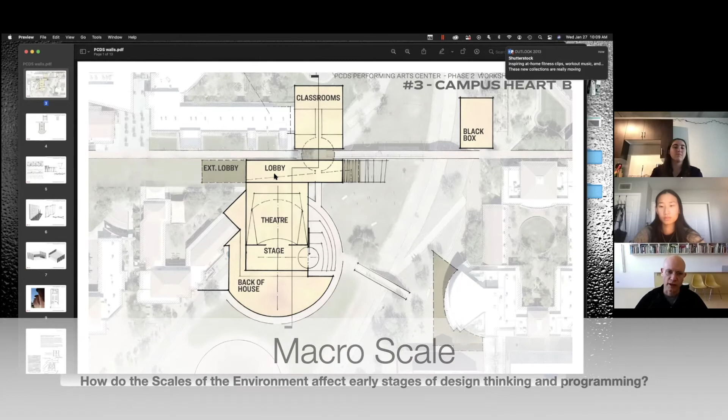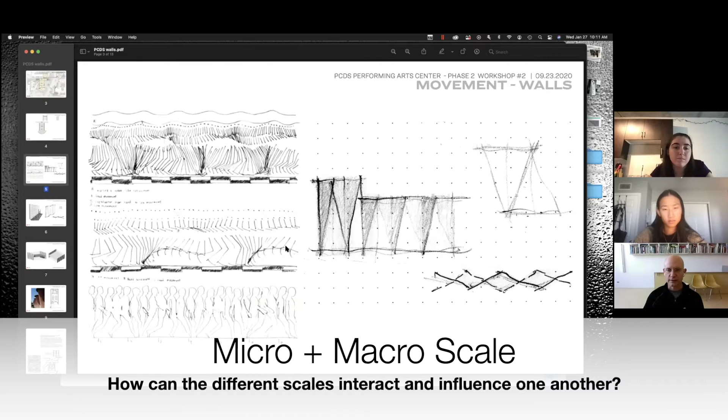We started playing around with what these walls could be, and we were sort of inspired by movement. And at the same time, we thought about what we could construct these of. And this is really the crux of the example of how to think about micro and macro and a site scale at the same time, and how they're so interrelated. And I would say that when they are interrelated and connected and serving each other, there's bound to be some level of success.

When they're not interrelated, I was trying to think about it this morning. I can't think of a good example of when the two scales aren't related, because we always develop our projects really thinking about both scales and how they relate. So we're looking at a way to do these movement walls, so you get lots of shade and shadow, and they have a big presence on campus.

And we were thinking about how you would build them, and we're thinking about just a simple 8-8-16 masonry module. And we knew inherently, and we've done this before, that lots of buildings are built out of these masonry blocks, and lots of contractors know how to build with them. If you take one, as you're stacking them, you can offset them a bit. And so this wall is an example of offsetting the block as you move up. And we said, what if for every course we offset them, basically about a 1/2 inch or 5/8 of an inch.

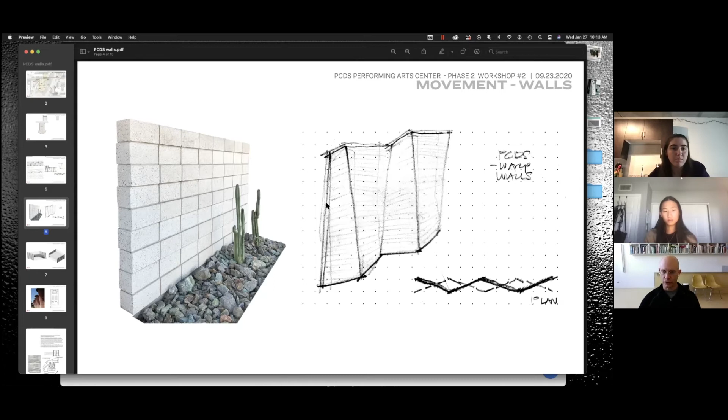Over the span of a 50-foot wall, how far could that wall move from top to bottom? And so understanding the nature of this 8-8-16 typical CMU block, understanding what it can do as you compose it into a wall, and understanding how you could push the limits of it, led us down the road of looking at these walls that started to wave and move, because as you were going from top to bottom, they were offsetting.

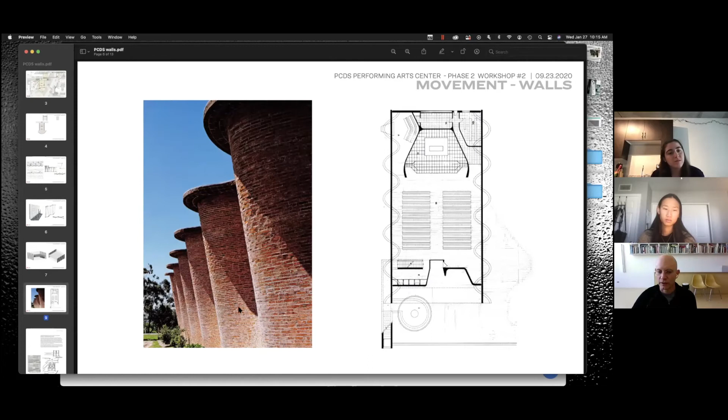And all of this was inspired by the architect Eladio Dieste, really considered a structural engineer. Essentially what he did, and this plan shows, the dark line is the wall at the bottom, and the curvy line is the wall at the top. What he's doing is each course changing the shape, so it goes from a straight line to a curve. And so we really decided that we were going to build on that.

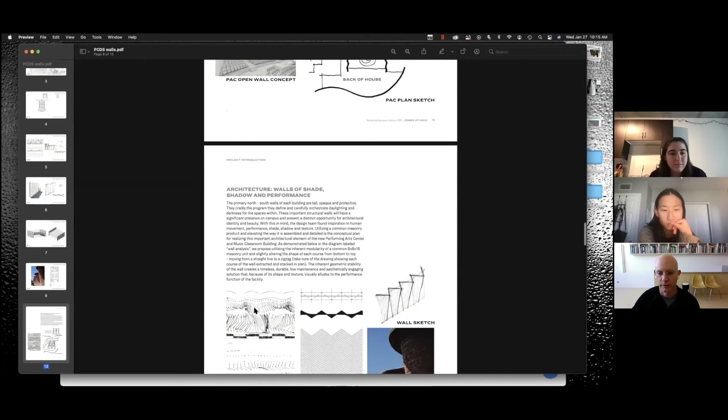And I wanted to show you this drawing here in the middle, because this is where we ended up. This is the sketch I did after our meeting with our structural engineer, where we said, okay, we're going to do the straight line at the bottom, similar to Eladio Dieste, and we're going to end up with a zigzag at the top. So if you look at that wall in plan, this is what it looks like: a straight line at the bottom, this zigzag at the top.

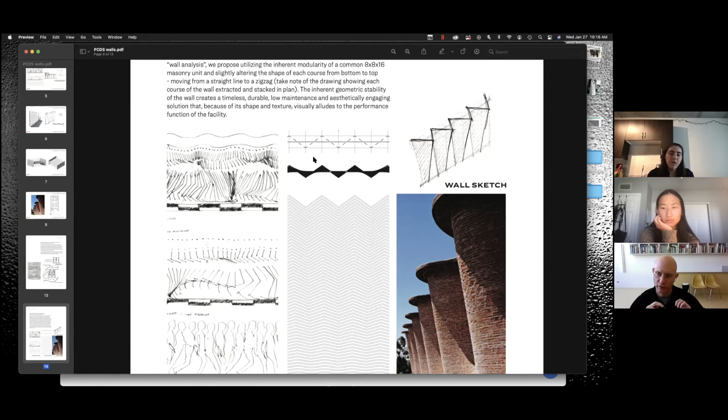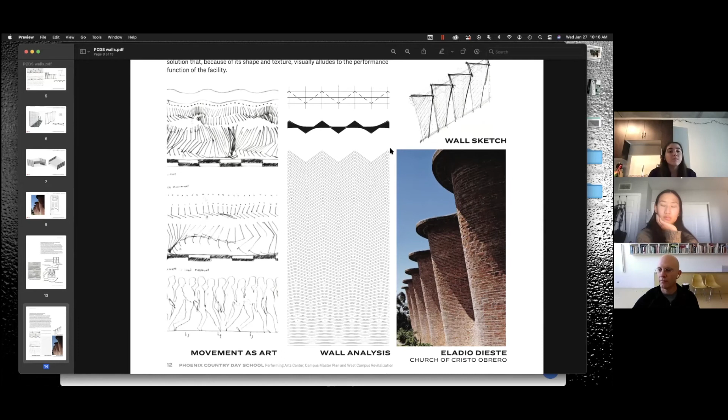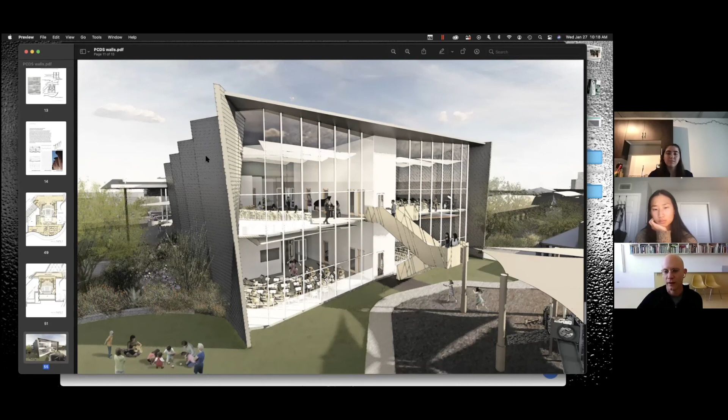And we derived how much of a zigzag we could achieve by offsetting each course a ½ inch, the limitations of the small scale and its impact on the larger scale wall. This drawing right here is every one of those walls. This is the wall at the very bottom as a straight line, and then each course as you go up 8 inches until you get to the zigzag at the top. Wow, it's amazing. In plan, these are the walls close to the bottom, and as you get to the top, these are the walls cut through. And this is a rendering of those walls, straight line at the bottom, zigzag at the top.

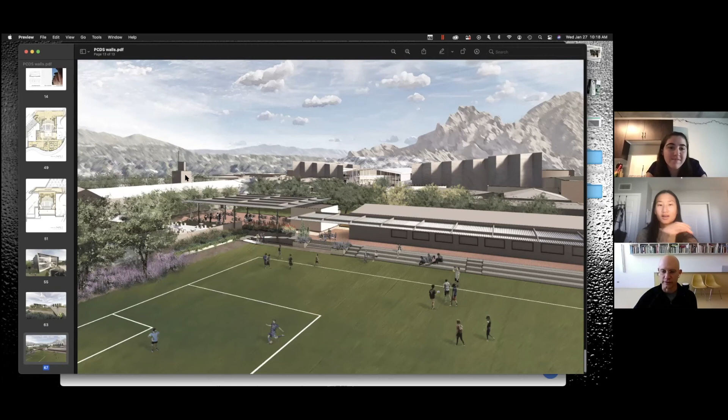Phoenix Country Day School is currently in the process of fundraising, and Jones Studio hopes to move towards construction once the budget is fully prepared. An interesting conclusion that Yasmin and I drew from listening to Brian was that the scales of an environment, site, macro, and micro, are most impactful in the design when they are fully integrated with one another. Although we also talked about site-specific design, such as orientation of thick walls and curtain walls to the sun and mountain views, it was surprising how many connections were made between the different scales.

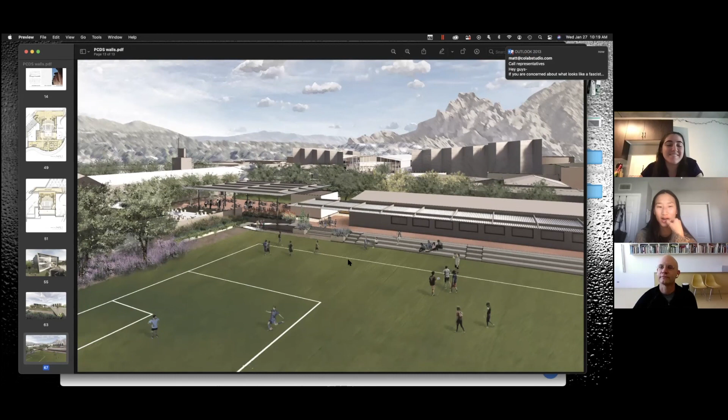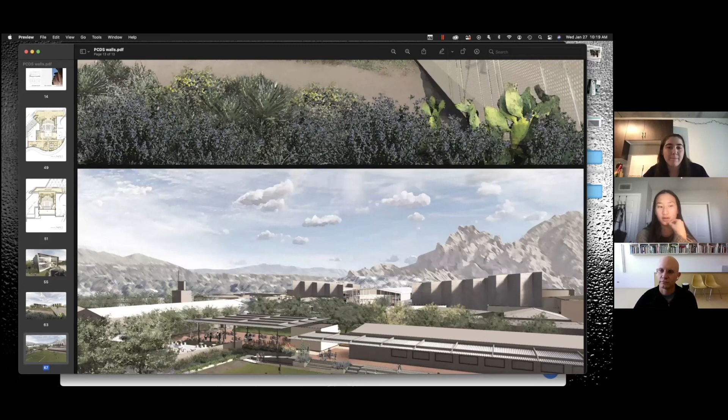They must share a common language to make the project feel cohesive, rather than feel as if a bunch of random decisions were made as different issues of scale arose. We appreciated Brian's emphasis on the shared language between the scales and how they come together to form one unified vision rather than defining the scales as completely separate entities. Each scale was well thought through and ended up being the basis of the entire project, determining how the design parti was worked out to communicate this philosophy of movement for the theater.

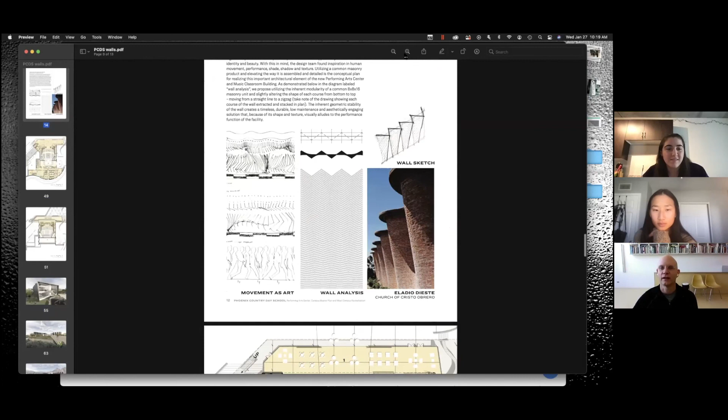Scales are an extremely important and foundational building block when considering early schematic and conceptual design, and will continue to influence a project into the final stages of its design. Therefore, it is vital to study them closely to determine exactly the needs, threats, and opportunities a certain site offers.